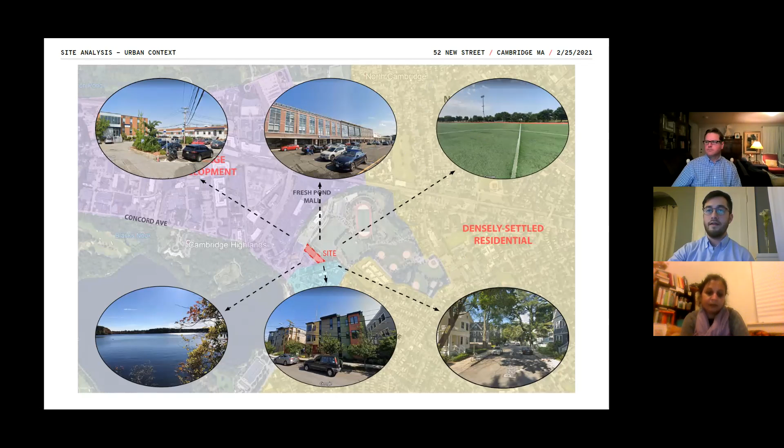What is particular about these two zones of Cambridge coming together is that we're located in this green corridor where the Danehy Fields and the Fresh Pond Reservoir create a great network of recreation, open space, and opportunities that our project can tie into and leverage to benefit the residents.

In terms of connectivity, our site is fairly well connected for vehicles.

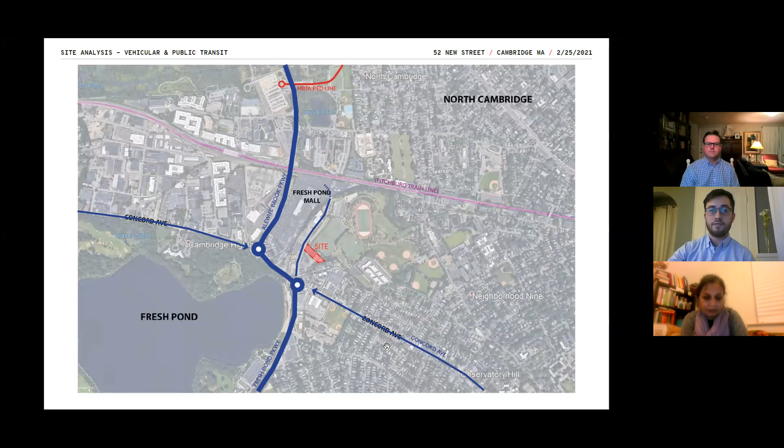There's the proximate arterials of Fresh Pond Parkway, the dueling rotaries along Concord Avenue, and the Alewife Brook Parkway that takes you out to the suburbs or follows Fresh Pond in towards the city. Also in terms of transit, there's relatively good bus connection along Concord Ave into Harvard Square, and Alewife is somewhat proximate.

It's about a 15-minute walk, a comfortable walk, but also a 6-minute bike ride from our site. While not ideal, I think there are some good bike connections along the Alewife Brook Parkway up to the T station there.

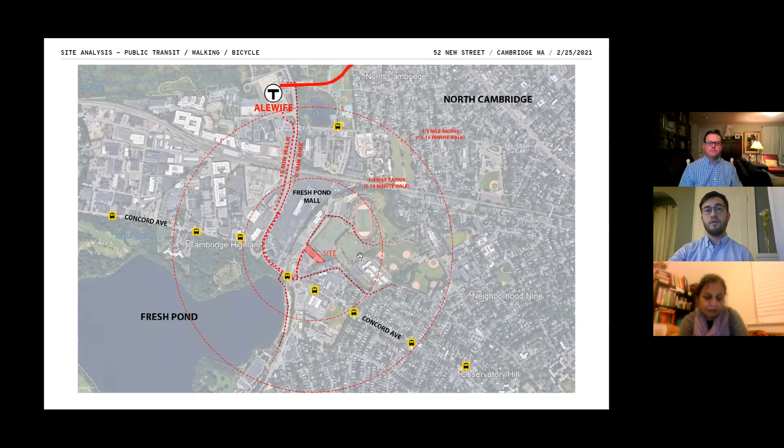But also just from our site, there's plenty of immediate amenities, a variety of shopping, various gas stations. So our corner of the city does have some walkability to it, but really the huge benefit that rises above those others is our direct abutting against the Danehy Fields, and this network of recreation and open space paths and connections in our neighborhood.

So from those existing conditions, there's the vision and the plan for what Cambridge can be. We want to ensure that whatever our project is doing, it's tying into and cohering with the vision that the city has set forth.

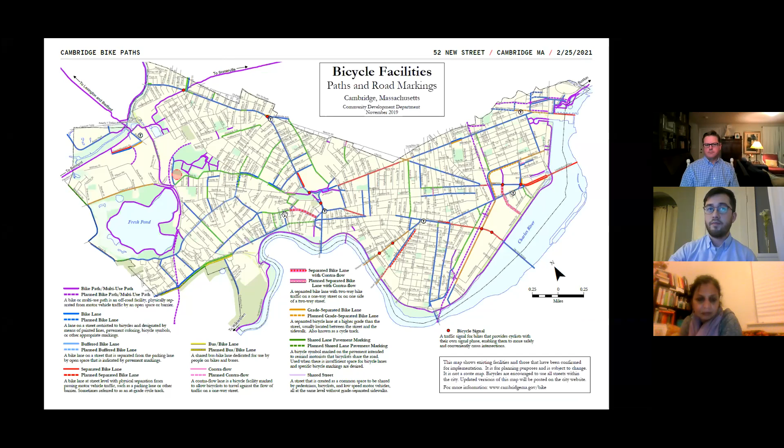So this is a map overall of the city. I think Cambridge has, certainly nationally, one of the best bicycle networks. Knowing the plan for where our site is, zooming in, our site in red, we want to ensure that it's maintaining, protecting, maybe improving the bike lane along New Street.

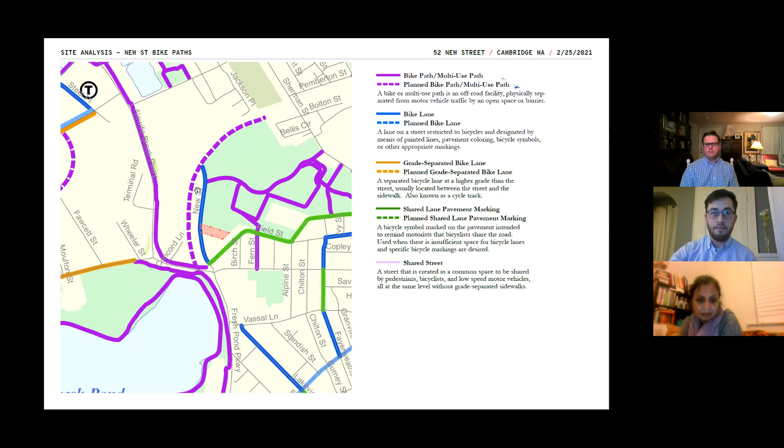Recognizing that there's a great network of existing bike paths around the pond and around the fields, there's also a vision for future multimodal transit happening along the abandoned railway, just a bit to the west of our site.

These slides we pulled out from a recent presentation with Envision Cambridge, ensuring that the project we place here is keeping an eye towards the future.

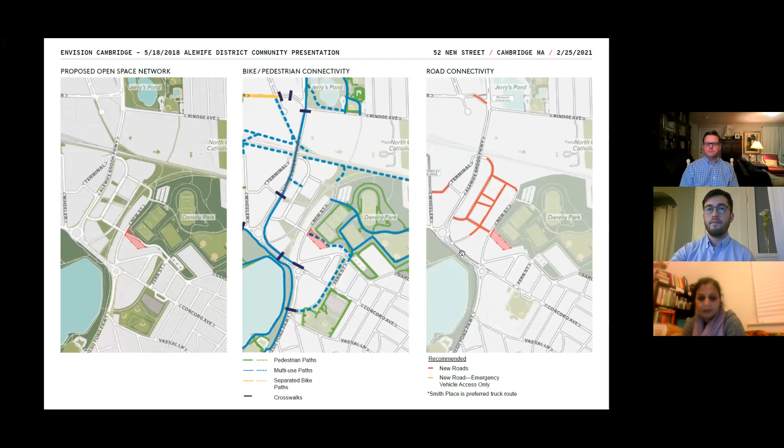That Envision Cambridge plan also sets together a great set of design guidelines that we understand our project will have to deal with, from creating resilient and green infrastructure, to ensuring that the public realm of our project is both responding to the streetscape and improving the conditions.

As Craig mentioned, we're considering a commercial space that can start to create that kind of liveliness at our street edge. There's a variety of architectural considerations we need to embody, acknowledging building entries so there's a safe sense of orientation and a sense of arrival when you're arriving at the building.

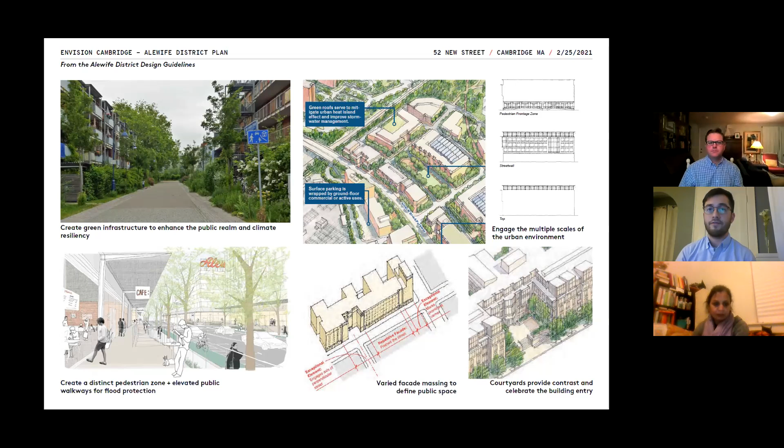There's ways of breaking down the scale of a building so it creates a human scale at the street, while being more about the traditional rhythms of Cambridge on the upper levels, and ensuring our projects leverage their size to fulfill sustainability goals, such as photovoltaic arrays along the roof and protecting ground floor parking with active uses.

So that's maybe a fairly quick overview of where we are at the city scale, and where we can tie into the vision of Cambridge more broadly. Now we can dive closer in to look at the site itself.

So the site is 52 New Street. We are fronting onto New Street, and its proportions are a fairly narrow street frontage and a fairly deep site, which already presents some geometric constraints we're having to consider. To the northeast are the Danehy Fields, that great asset and vast recreational resource for the city.

If we were to take the Cambridge city base, we're at about 17, and it does dip down about 4 feet to just before the existing fitness center. That already presents a bit of a design constraint, where we're starting to think about how we're creating a site with some resiliency and stormwater issues, which I'll get to in later slides.

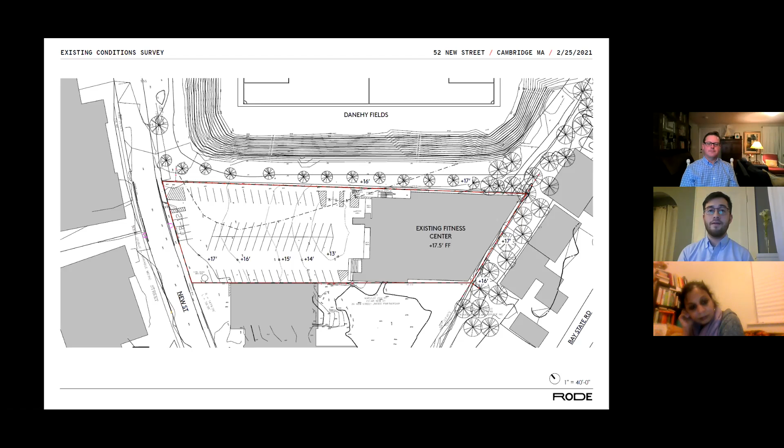So those are all the varied existing constraints of the site. As I mentioned, the topographic change does have some ramifications for resiliency and stormwater management.

This is a snapshot from the Cambridge Flood Viewer, and this shows where, again, our site's going from about 17 down to 14. We're seeing that there is really some potential impact to our site from long-term sea level rise and from projections for stormwater and significant storm events.

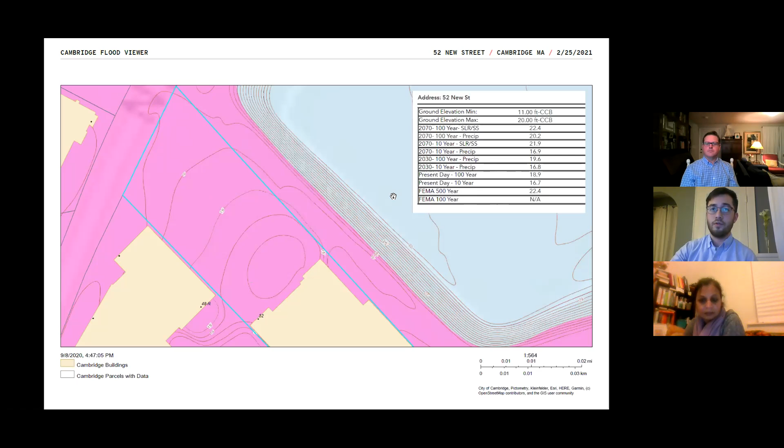So right from the beginning, the concern we need to maintain and be aware of is that any ground floor program serving our site really needs to be lifted up away from the sidewalk. So any program spaces like the lobby or potential commercial space has to be lifted up, and under the potential maximum zoning height of 70 feet under the affordable housing overlay, that constrains what we're allowed to do with our potential residential.

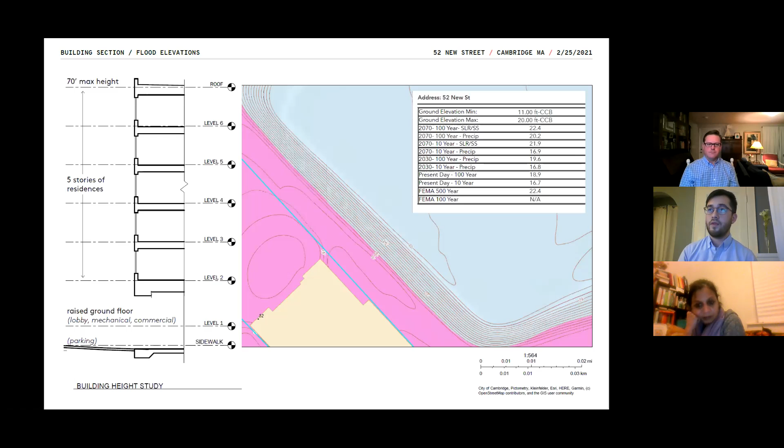I do want to touch a bit on the practical ramifications of what the affordable housing overlay allows us on this site.

We are an industrial zone by base zoning, but the affordable housing overlay does permit going up to 70 feet and 6 stories. That's really a means of enabling clients like Just-A-Start to provide a critical mass of affordable housing while leveraging economies of scale, allowing something that feels larger than some surrounding buildings but at a scale we feel can be made to feel contextual within neighborhoods, particularly here where the 70 feet is allowed in what was formerly an industrial district.

So walking through what the zoning allows, the floor FAR refers to floor area ratio, which is a way of zoning to manage the density of a site, measuring the ratio of the built area of a building against the area of the site.

So whereas the base zoning is a 1.5, there is no maximum FAR. Instead, the zoning prefers to use measures of height and setbacks to constrict the density of the project. As mentioned, we're allowed 70 feet because we are potentially proposing a commercial space on the ground floor, and 6 stories in the building. The side yard and rear yard handling is admittedly complex for how the industrial lot handles residential projects, but concisely, we're allowed a 7.5 foot side yard setback and a 10-foot rear yard setback under the affordable housing overlay.

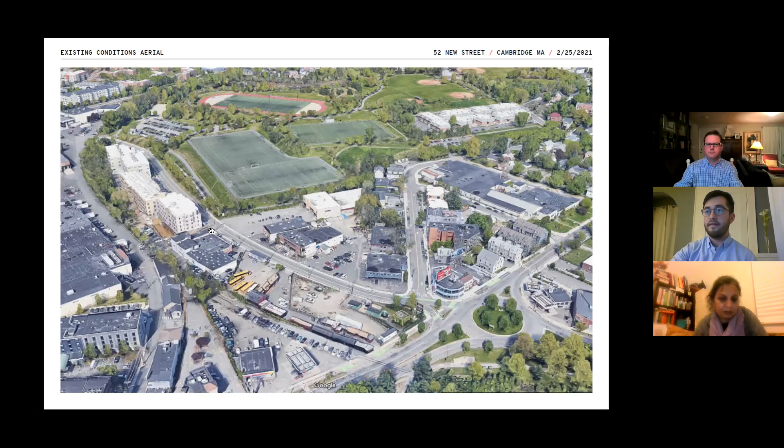This aerial view shows Concord Ave, the Rotary on Fresh Pond Parkway, New Street sweeping up along this edge, and here's our site with the parking lot pitching down and the existing gym on the site. You'll see the slope up towards Danehy Fields, and New Street itself as a collection of what I'm calling a kind of legacy semi-industrial auto body shops, mixed use. There's a dance hall in the structure just south of our project, but farther up New Street you see the trajectory of where it may be headed, with mid-level rise multifamily developments already starting along this edge of the park.

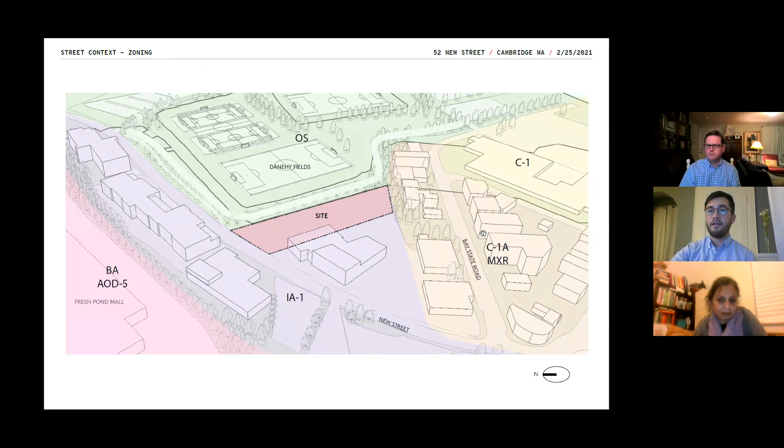Our site, as mentioned in the zoning, sits where our industrial district captures most of New Street. We directly abut, to our project south, a residential C1A district with a mixed use overlay, and we've already seen the implications of that in the multifamily developments happening along the edge of Bay State Road. There's also the Fresh Pond Mall, its own zoning district, and the great expanse of Danehy Fields.

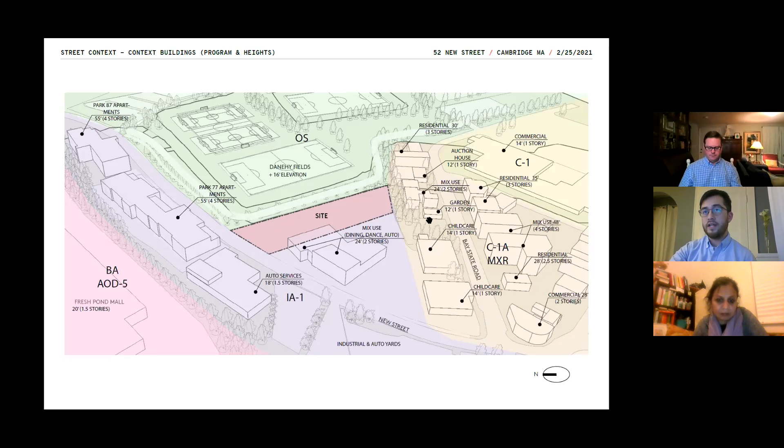The scale of the structures in our proximity along this edge of New Street may allude to the future of the street, whereas to our project south we're keeping in mind that we're abutting something of a smaller scale—1- and 2-story mixed use structures. This is reflected in an abstract diagram looking at the scale of facades and buildings around our site, making sure that our project, which will have a heft and density a bit larger than that, has a way to break down the massing, creating a language that is harmonious with the existing neighborhood.

And with an eye to the future, thinking that potentially these sites to our south and west have the potential to be developed in a similar fashion as ours, we want our project to be responsive and help set up what can happen on those future sites.

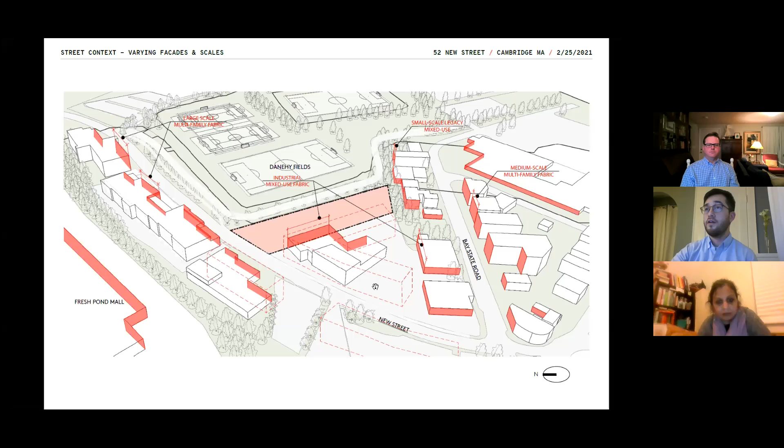So in terms of connectivity, thinking back to those slides we saw from Envision Cambridge, and now knowing about the constraints of our site and the geometries we're working with, for vehicular access we certainly have the narrow frontage along New Street that we're having to contend with. Knowing that we want to create a separation between cars, trucks, and loading, we're thinking about how we can leverage those constraints into the conditions we're hoping for.

So keeping vehicles to the project south, we're thinking about pushing pedestrians more towards the north corner, which has this connection with the fields and with the park, tying into the green showing recreation. The idea is that this edge of our site responds to the fields, and while not in the near-term future, this edge wants to be planning for, or anticipating, a more active edge in the future.

Nevertheless, for the short term, we know that this edge of our site wants to respond to concerns about safety and lighting, and about providing more program along that edge instead of a blank facade or a dead end for our project.

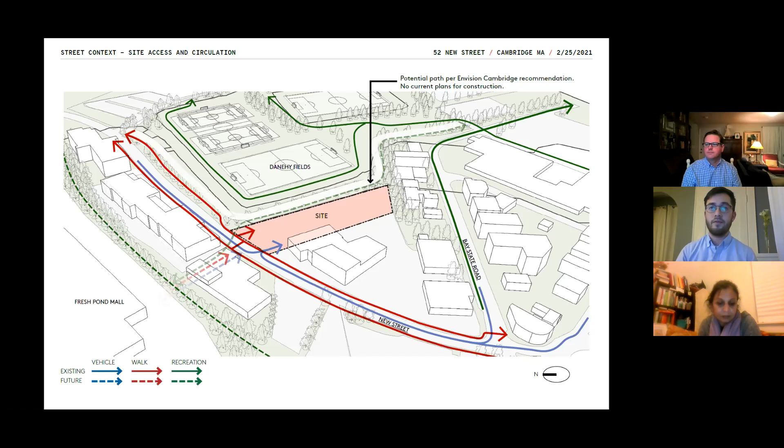As we start to think more about the character of a building, here we're looking at the existing character of the neighborhood—how these buildings, growing up in scale from the smaller residential neighborhoods, are being treated. Are there maybe some more industrial type materials that can be applied at a larger scale?

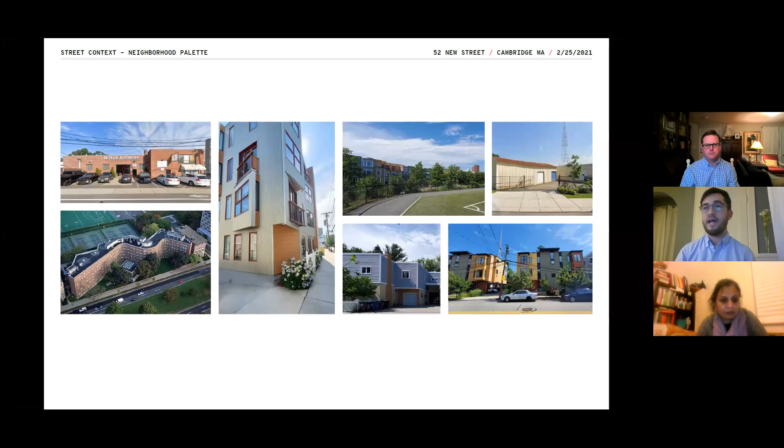And last, I'd be remiss if I didn't mention the Baker dorms at MIT, which have this great effect of providing what is a fairly large building—how you treat that, where they're looking out onto a recreational expanse, the Charles River and Memorial Drive. We have the opportunity to create a similar kind of gesture potentially at Danehy Fields.

So the design inspiration—this is where we take our designer's eye and try to look towards what the project could be. This is just our take. We're really eager to hear what other ideas you may have for us, what other parts of your neighborhood we haven't considered yet. But this is just a first taste of what sets up the second community meeting.

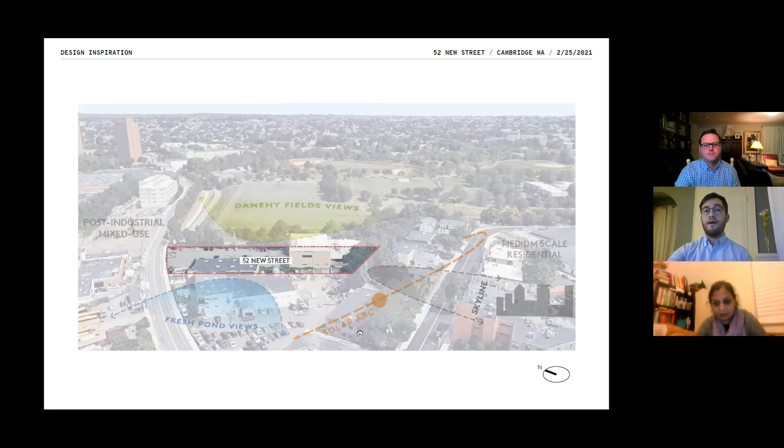So as I mentioned earlier, it was a clay pit. It was excavated to create the bricks, which created much of the structures of the city. It became a landfill for a number of years. It provided a place for the fill from the MBTA when they were doing the expansion from Harvard out to Alewife, and then became this platform for the fields. So it's almost like a living history of Cambridge, showing the way that it's transitioned and evolved throughout the years.

Thinking about that, each layer becoming necessary for the next - whereas the clay became this excavation, it became this natural place for, we know better now, but we placed the landfill because it was convenient and it was a place for us to place this waste.

We're trying to look at that as maybe representing a collective point that shows the idea of the many cultures and many peoples of Cambridge. All of our content is held here. Although it's a landfill, it's still this kind of time capsule that represents the diversity of Cambridge.